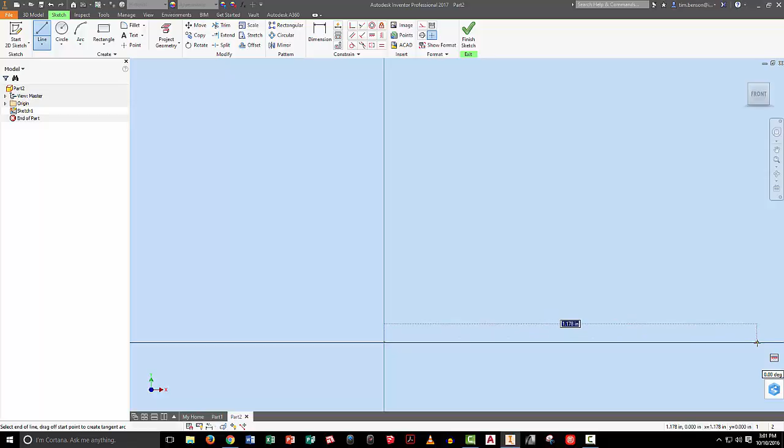We're going to start with a simple sketch, and I'm going to pick my XY axis again, or my plane, and then I'm just going to start and sketch in some shape. This one, the part we used a 5-inch or 6-inch rod, so this needs to be relatively small as well. So I'm just going to throw a couple things in here, a rough shape for the cross piece.

I know I can put some constraints on here and tell this piece to be parallel to that. It already is, but if I wasn't, I could force it to be. Make sure these are at right angles to each other or parallel, which they already are. So we're all good there.

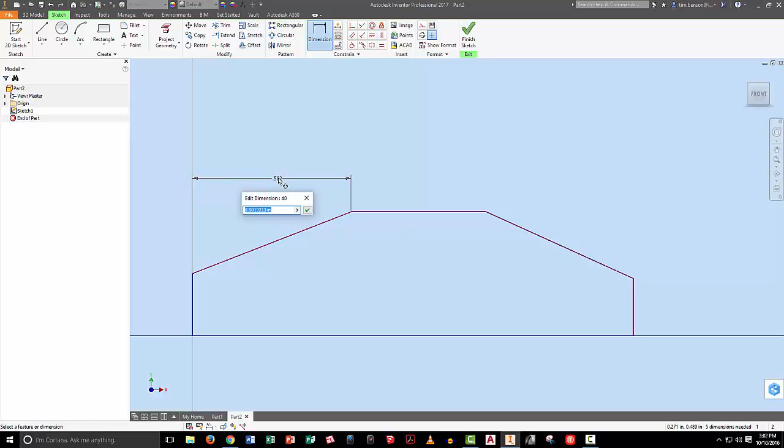Now I just need to do some dimensions. So I'm going to put a dimension here, drag that up. That needs to be about an inch for what I'm thinking, because I think this should be roughly 2.5 inches. So let's make this an inch as well. That should give me a 1/2 inch in the middle. Right here, let's go 1/4 of an inch thick. That should be plenty thick for what we're doing.

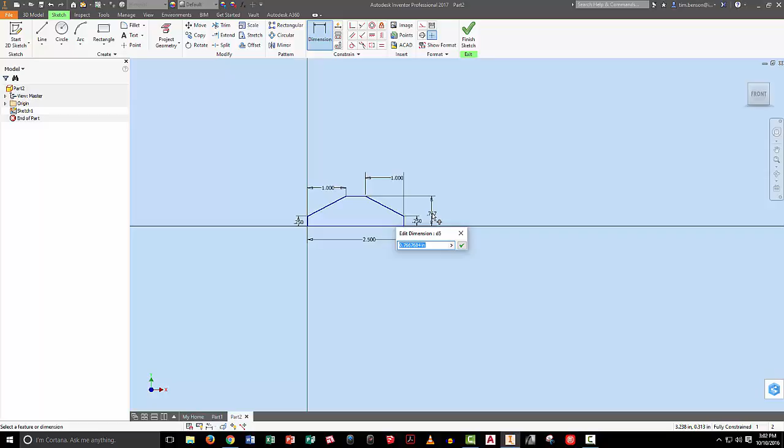And then this overall depth, cancel, I didn't click the right line. This overall depth from here to here, let's go 0.625, 5/8 of an inch. That should work out well for us.

You know what? Let's change that. I'm going to want to go a little deeper on my shaft right here when I put in the handle. So let's go 3/4 of an inch. Once I've got that, hit finish. And I'm just going to bring that on my screen, and we're going to extrude it, a 1/2 inch.

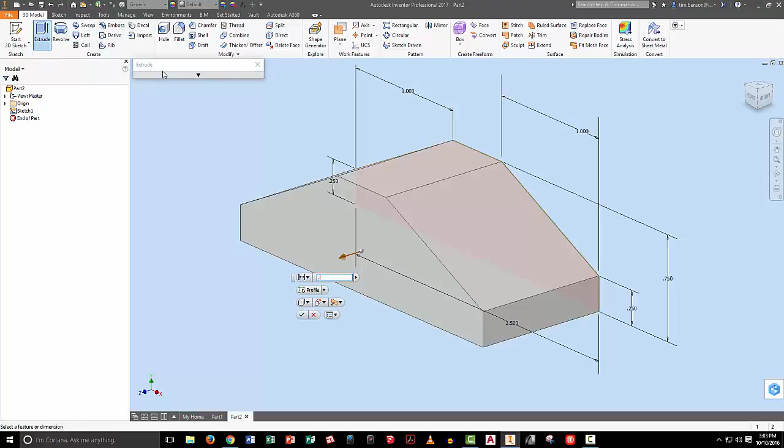There he is. Now, so there's my part. So now I just got to put some other stuff on it.

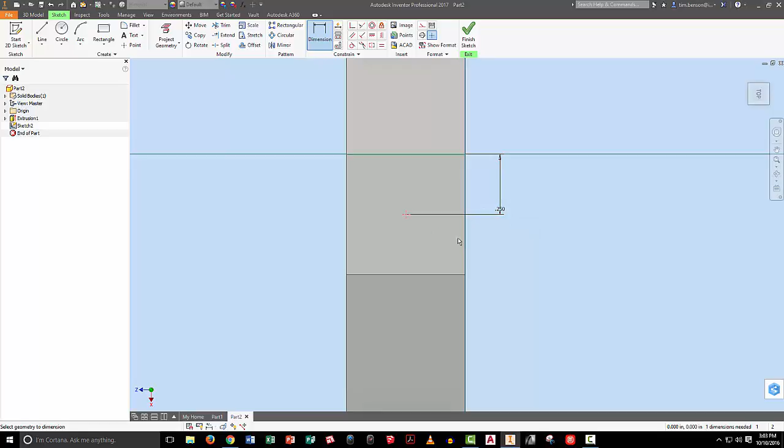I'm going to go to this surface right here, and put it in the middle of my screen, and put a point on there. Just a random point, try to get it in the middle. I know that I had 2.5, so this should be about 1/4 of an inch in each way from the edge. So it's a 1/2 inch by 1/2 inch area.

So that way I do that, and I'm just going to simply go here and go hole. Now my hole, my rod, I made 1/8 of an inch or 0.125. So I'm going to go 0.13. That gives me roughly 2/1000ths, just over 2/1000 of an inch of leeway all the way around the rod. So that'll go through all, and that'll work for me.

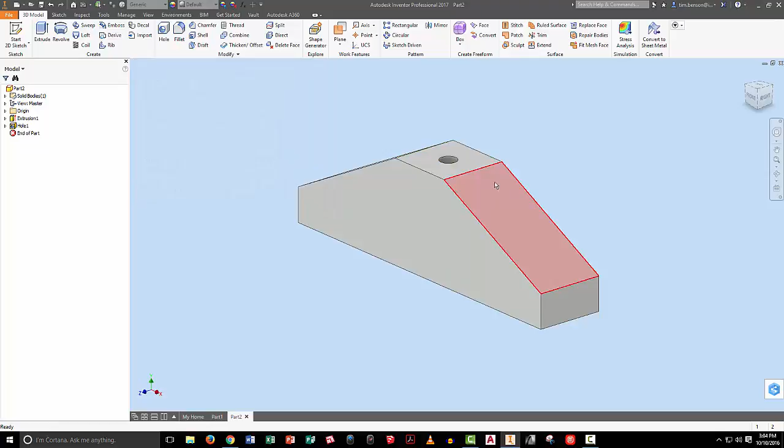Then I'm going to go back to that same surface and sketch again. Now I've got to put another hole, but this time I'm going to have it threaded. So I'm going to go put another point, and I'm going to hover. See, I get it go black on my circle edge, and I got the center marked. I can click on that center mark now and snap to it. And now I can just finish that sketch, and I can do another hole.

This time I can tell it to thread it. So we're going to load up the threading tools. And it's not going to go through all, it's going to go to a depth. So instead of shooting all the way through the part, we have to have a depth on it. So come on, machine, I think my computer hates me right now. No counter bores or anything on it, nothing out of the ordinary.

I'm going to go, let's do 5/16, and we'll go with a UNF thread. I could do a UNC, but I'm going to do a UNF. It's not going to go through all. I want it to a distance, and let's say halfway through that, because I went 0.75, and that'll get us where we want to be.

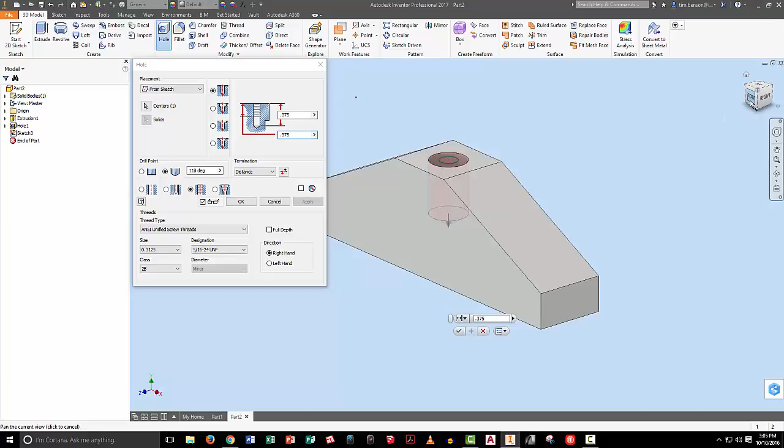So that way, if you look at this, you can see my hole going through. It's going to go halfway through. The bit's going to go a little farther, but that hole goes through there. It'll help act as a funnel if we're ever shoving the rod in. Right-hand thread, so normal 2B thread. We're good. So click on that. Let's tip this up so we can see what we just got.

Good. Now, last hole. I want to sketch on this surface, and I want to put it right in the side of this. So I'm going to do another point, just slap it on here. I'm making sure I don't snap to anything, though, because I don't want to have my hole constrained to like a point when I'm trying to get it centered. I know that's 2.5 across, so I'm going to go half of that.

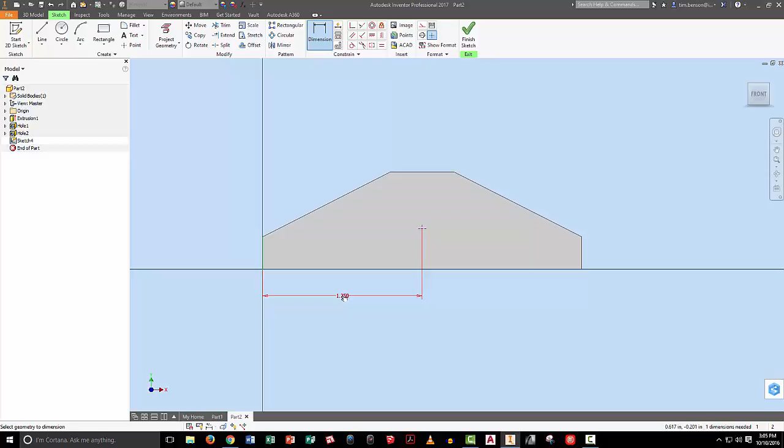And I probably want this to be not quite... come on, like me today. Not really quite that far up. Let's go 1/4 of an inch up. That should do it. And then I'm just going to go in here.

I'm going to go another hole like before. But this hole, I need it to be flat on the back end. So it's not going to be a drill point. I need a flat bit on the back.

Yeah, that's probably a good depth. But I want a 1/4 inch bolt on here. So I'm going to go down here, I'm going to go 0.25 because 0.25 works a lot better. But see, my distance suddenly jumps up over here. So I got to bring that back to 0.375 here and here. And that should get me where I need to be.

Okay, so if I turn my hole sideways to me, see it goes through, but not all the way through. So it's not going to break my part.

Threading, yeah, I'll leave it at a 20 UNC. Yeah, that'll work fine for us.

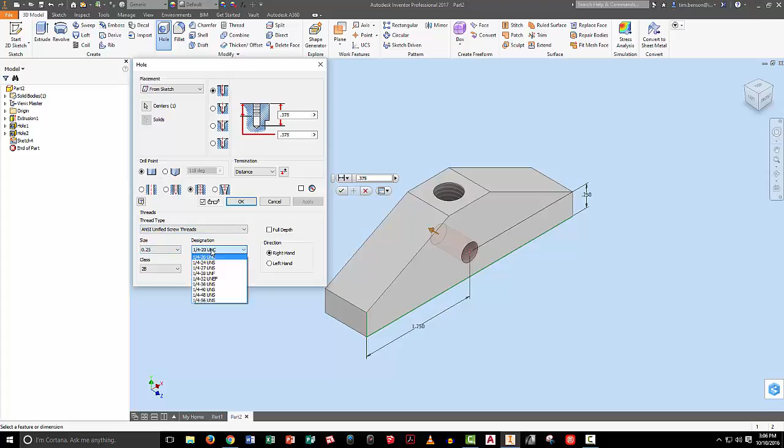Other than that, I just have to say okay, now my part's done. As soon as I change it to, I'd probably make this out of brass personally, but, you know, my part's done. Thanks for your time.